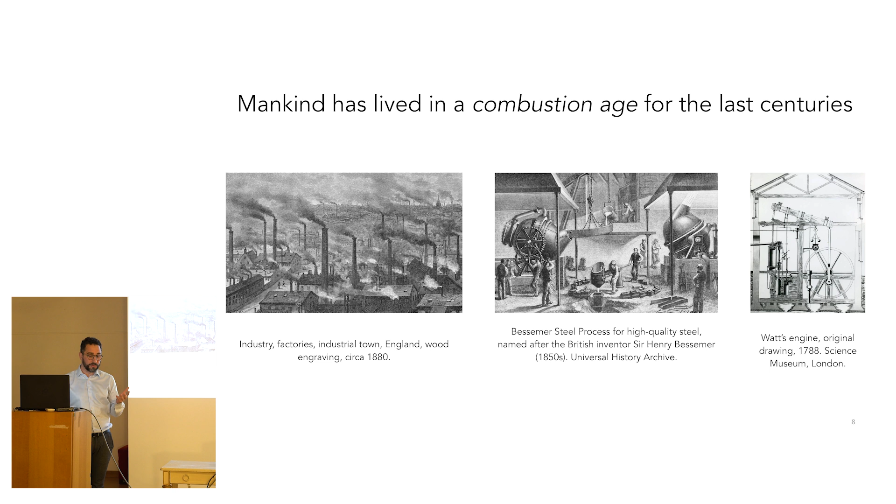And this was the time when combustion was used to produce materials like steel, and it started to be used for transportation. You see here the original drawing of Watt's engine, and you see here the first steelmaking process, which was really delivering high quality steel, the Bessemer process. So I think it's really fair to say that we have lived in a combustion age for the last centuries.

And even Europe, I might add, has its roots in combustion, because you probably know that after the war, it was decided to unite, you see, la mise en commun de production de charbon et d'acier. So these industries of steel and coal were put together in the effort of not only sharing the resources, but also preventing future wars. So we could say that Europe has its roots in these combustion processes.

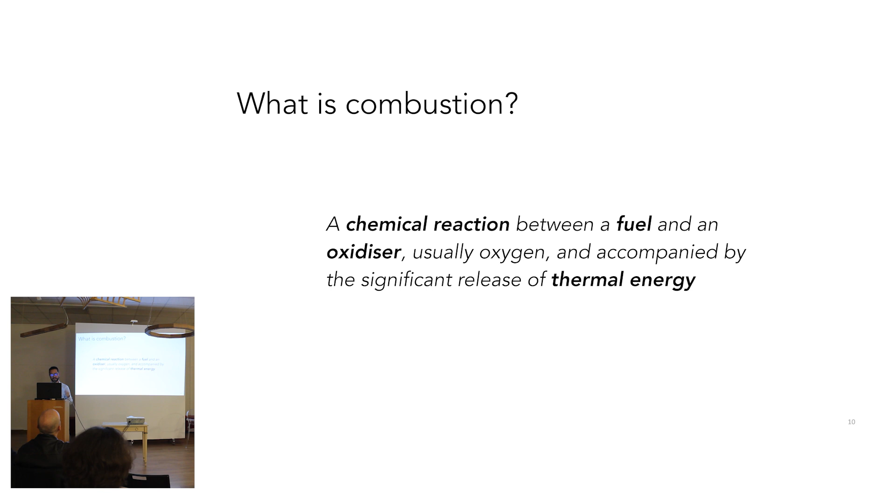But then you might wonder, so let's try to not be the alchemist here and define what combustion is. Combustion is a chemical reaction between a fuel, the substance that contains in itself the energy, and the oxidizer that allows this energy to be released. This oxidizer is usually oxygen, and this is associated with a significant release of energy. This is why it has been used so much and to that extent in the last centuries.

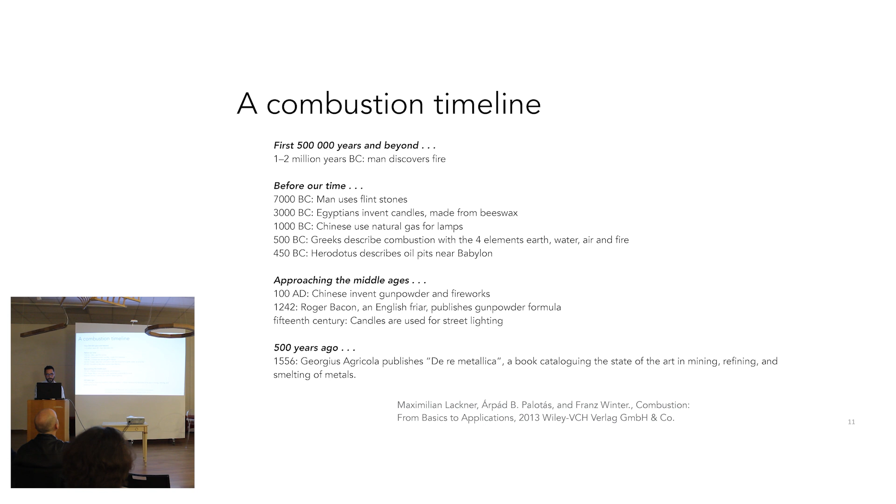So I actually drew a timeline, and these are four slides. Julien told me to remove it, and I didn't. But anyway, I just kept it to show a couple of things. So when you look at this timeline and you look at very long ago, you see that a few things happened, but not many.

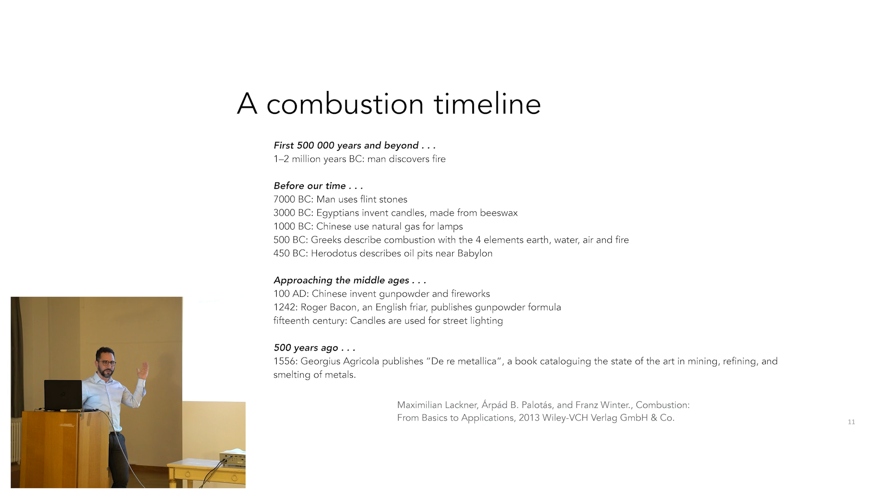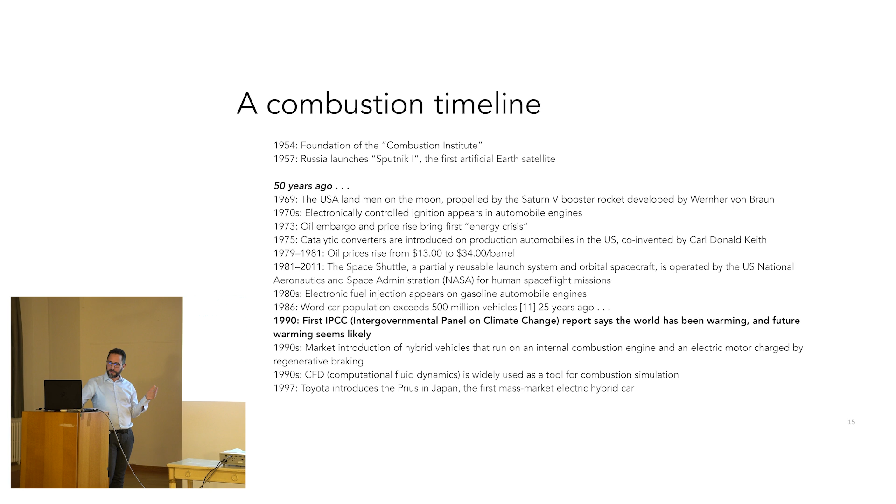And then you see that as we go on and on, you have many, many things that happen. They become denser and denser. I also discovered that there is a Nobel Prize on combustion, and I didn't know this. I admit my ignorance here, so I didn't know. And then you see that it really becomes really dense, all the discoveries and associated effects to combustion.

But you see that when you approach the 2000s, some of the aspects that are associated to combustion are more related to the downsides of combustion, so the negative effects. And this is particularly visible in the last events that I have highlighted here. So they are all events that I have highlighted to point out the negative effects brought by combustion on the climate, but also on air quality.

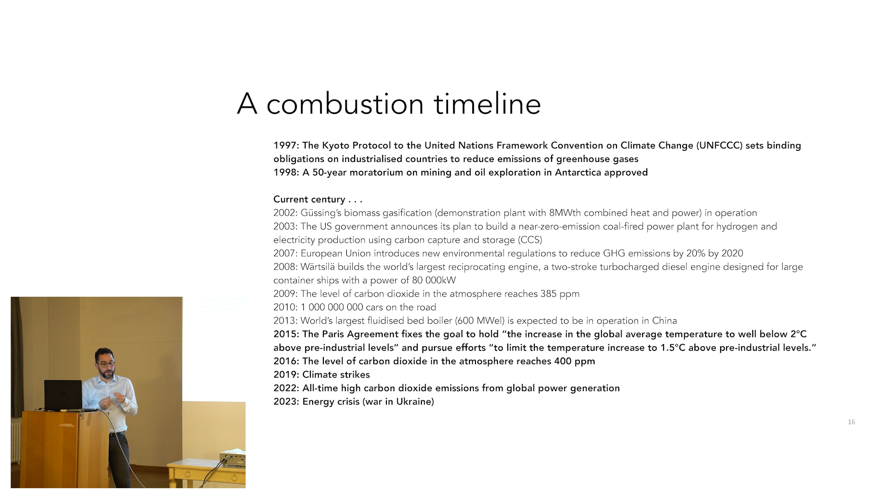Okay, so this brings me to talk about this. What are the problems that are associated to the use of combustion processes? You probably know that in the COP21 it was decided to try and limit the temperature increase to 1.5 degrees. This is associated to a certain amount of CO2 in the atmosphere. However, when you look here at the carbon budget, so the amount of emissions that we can still afford to be able to keep this temperature increase below the 1.5 degrees, we realize that we have almost depleted this budget.

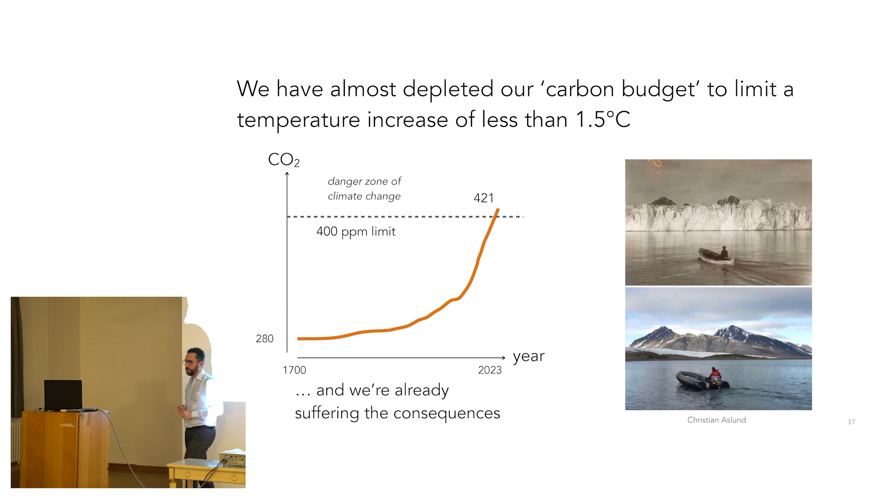And we already know that we're suffering all the consequences, because we have all proofs of the effect of climate change. And here I just wanted to point out this with this beautiful picture of the Swedish photographer Christian Aslund. There is a website, you can go and look it up. What he did was to take pictures after 100 years at the same location, more or less, in the same period of the year, and you see the big impact of climate change, especially in the northern regions.

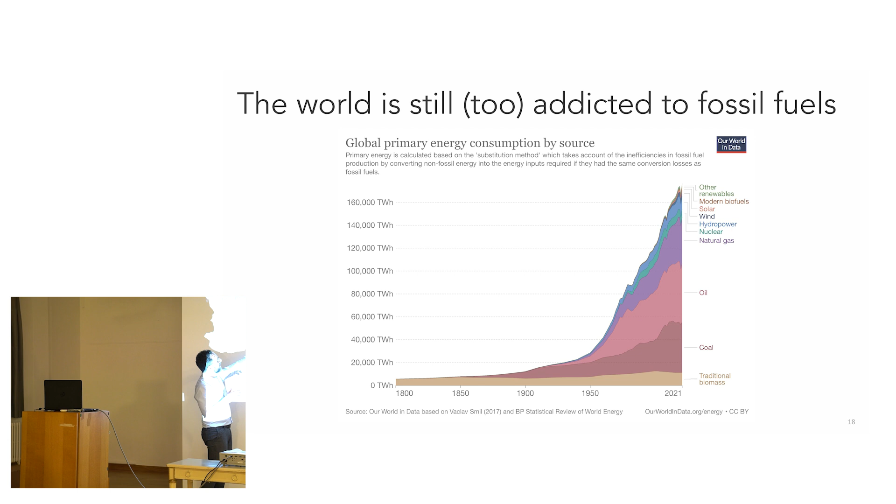When we look at this, we think, okay, where are we with using non-fossil fuel resources? Because, of course, the combustion of fossil fuels is responsible for that. And probably you have used this website, or you're familiar with Our World in Data, because everyone has looked at this website during COVID. But here I want to show you the energy use. So here what you see is the global primary energy. What is primary energy? It is the energy available in nature. So fossil fuels, you see hydropower, and so on and so forth.

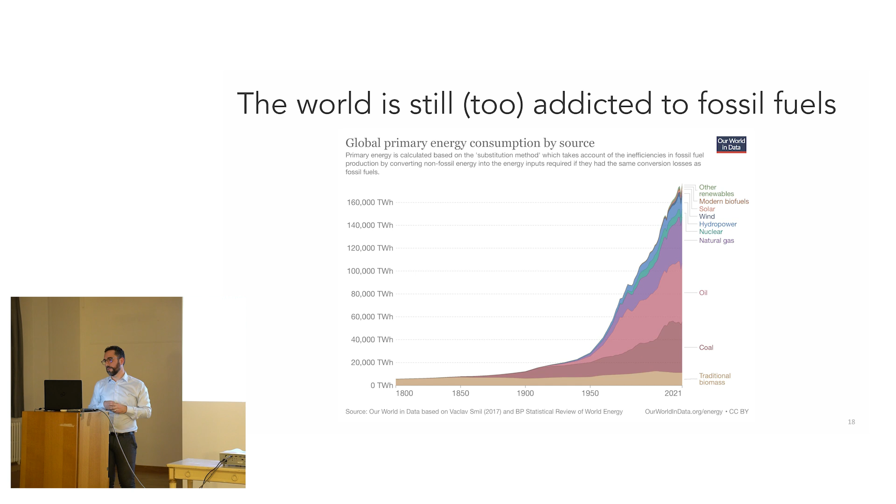I also want to point out something here that if you go home with this message, I would be very happy. There is a great misconception on energy. One of the main ones is energy equals electricity. Electricity is only one of the end uses of energy, and it's not even the largest one. The largest end use of energy is heat. Almost 50% of the energy use is to produce heat. Heat that is needed in several processes, like casting, steel production, glass production, ceramics production.

Everyone here has something on himself, herself, that is associated to a combustion process. And so this is something that we all should keep in mind. Electricity is just the tip of the iceberg. What is below is much more relevant and scary from a certain point of view. So heat is the big elephant in the room, we could say that. And it's a big elephant in the room that poses a lot of issues.

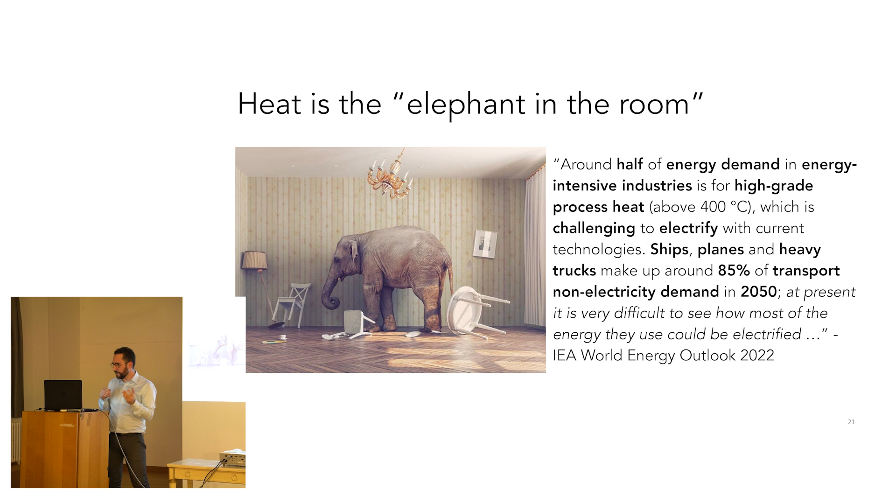Because even if you look at the World Energy Outlook, which is produced every year by the International Energy Agency, there are big issues associated to electrification of processes to produce heat. So while several other processes like heating of this building can be electrified easily, it's not easy to electrify the production of steel, glass, ceramics. Everything that goes under the umbrella of what we define energy-intensive industries, or hard to abate. Have you heard of hard to abate CO2 emissions? Energy-intensive industries.

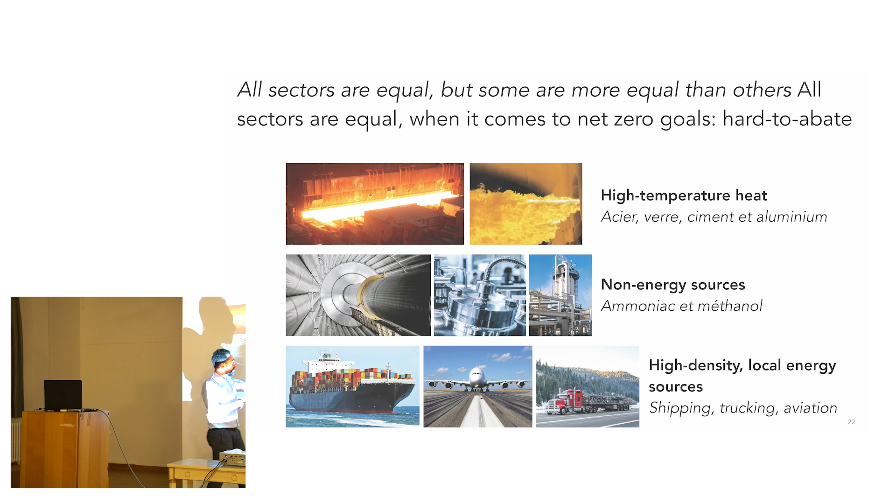These are all these industries that require high temperature heat. So heat at very high temperature that you cannot provide with an electrical equipment, or they need non-energy sources to produce chemicals. Ammonia is the main fertilizer used in agriculture. These require a lot of energy, and this energy cannot be provided otherwise than with fossil fuels today. Same methanol. Sorry, I don't know why this is in French. Methanol and ammonia. The same stands for high density local energy sources, and so everything that concerns shipping, trucking, aviation.

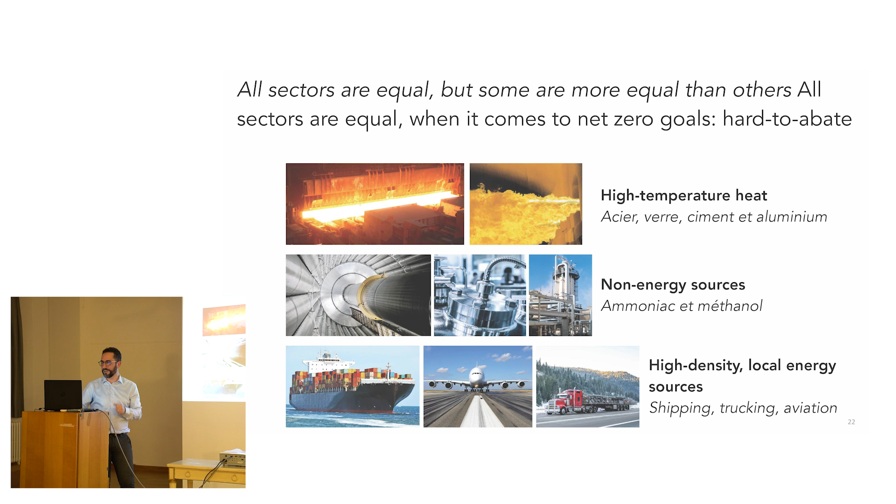So here I was citing George Orwell. All sectors are equal, but some are more equal than others when it comes to these net zero goals. And these hard to abate sectors are really, really hard to abate. It's very challenging. I want to actually show you why this is challenging, and then maybe give you some optimistic view on the future, and not to go home with a dark view on the future.

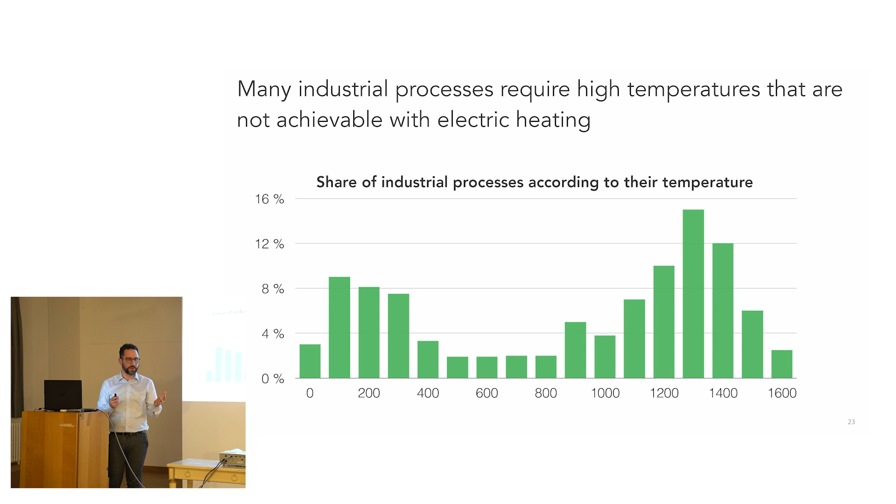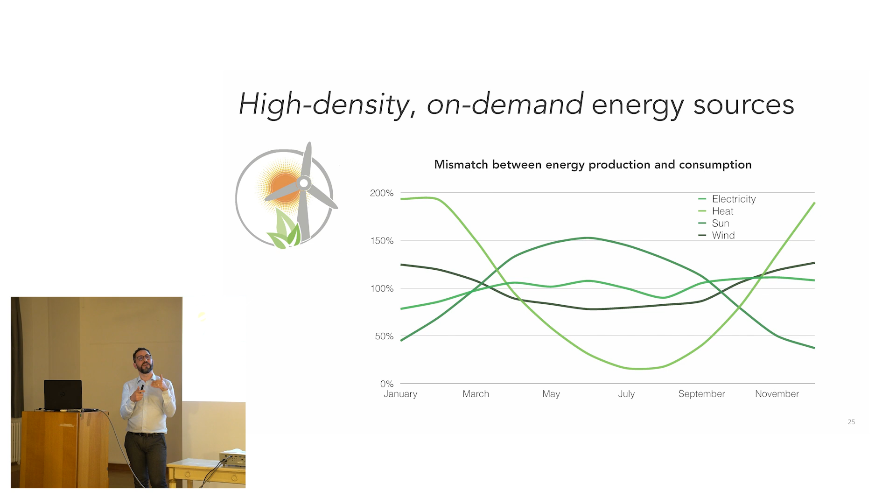Now I want to give you an example, and I think it's a very clear example that shows the challenges here. Have you heard about Solar Impulse? So it's a remarkable technology development by Solar Impulse. It's a company, and it's associated to an industry that is in Brussels, Solvay. So this is an airplane just powered by solar panels. You have solar panels on the entire wingspan and the body of the airplane. However, this is one passenger, 200 square meters of PV cells for a very small weight, 1,600 kilograms. Now you might wonder, let's do the same on a Boeing 747.

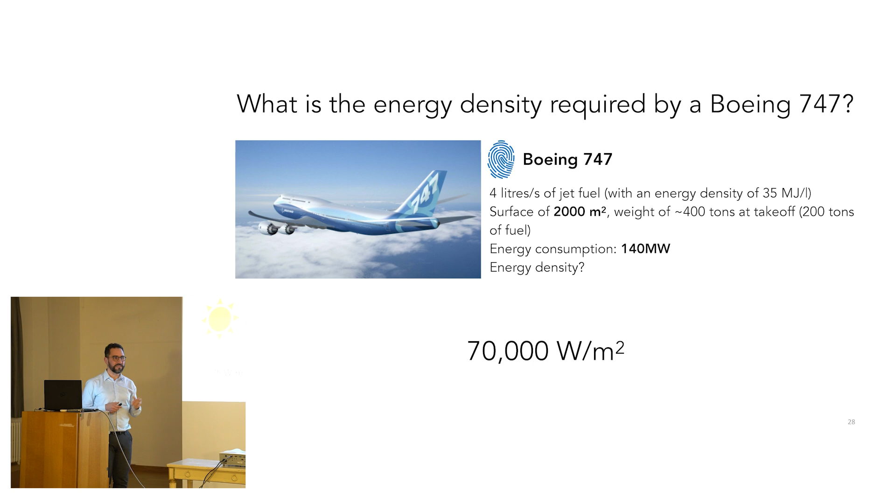What can I get with solar panels? I can get 75 watts per square meter. Okay? So it's 0.1% of what is provided by jet fuel. So you see here the magnitude of the issue. The big elephant in the room is 3 orders of magnitude bigger than us. Okay, and now there is the fun. The people that like Tesla will say, okay, I will put Tesla batteries and I will run my airplane. However, you will realize that the weight of these batteries will be 50 times the weight of your Boeing 747, which will never take off. Okay.

So these are the issues we are with. So what are the issues? The issue is that these industries produce 30% of the global greenhouse gas emissions. They are responsible for 10% of the CO2 emissions from combustion processes, and they are very highly integrated. But the real problem is that we need them. We need steel, we need glass, we need ceramics. And so what do we do?

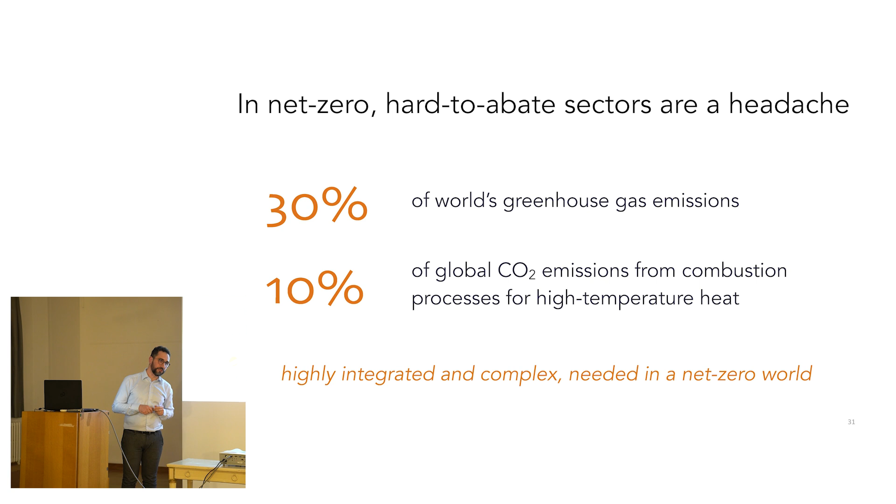So this is why these are really the sectors where we would say this is a headache. There are solutions, and people are working on that. And I think Europe is actually funding a great deal of projects on that. What is a possible scheme to address this?

One scheme: I've talked about the mismatch between the need for energy and the production of energy. This also means that there are periods of time where I have excess production from renewables. What I can do with this excess of production is use it and store it in what we call synthetic fuels.

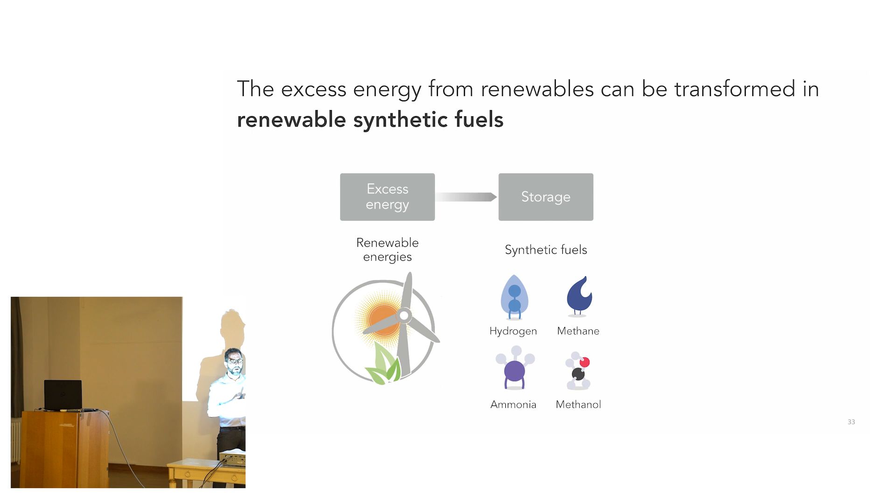Now, these are fuels that are produced by reactions that are controlled in reactors, but now you're no longer using a fossil fuel; you are producing the fuel yourself by doing what? By using this energy to electrolyze water. The electrolysis of water will produce hydrogen. Then if you have nitrogen from the atmosphere, you can produce ammonia. And if you have any source of CO2, carbon dioxide, you can go on and produce your synthetic methane or synthetic methanol. This approach is interesting.

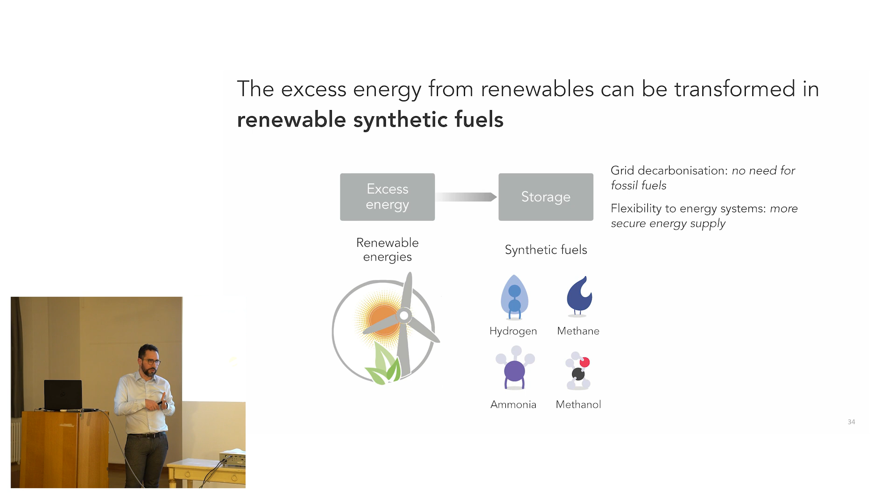Why? Because it provides a solution to the decarbonization goal that we are after. So we can decarbonize the grid because we can now rely on synthetic fuels. We don't need fossil fuels anymore. And it also provides the flexibility of the energy system, because now we could produce, theoretically, the fuels wherever we want. We just need wind and sun and some chemical plant.

So in Belgium, maybe you don't have sun, but you have wind. Just to say that you can produce hydrogen also in Belgium, and there are many projects in Antwerp in that respect. However, and here comes the interesting part, once you have produced this fuel, I would say that the ball is again in the field of combustion, because you might have whatever fuel you want.

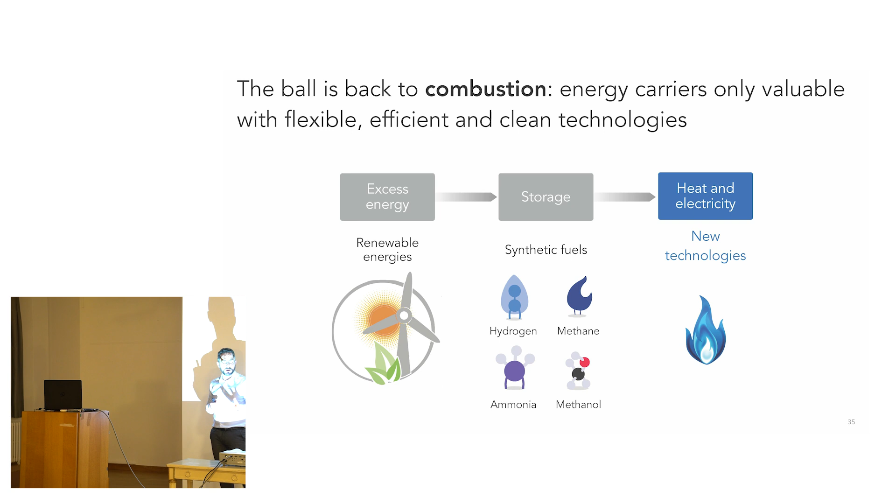Synthetic fuels are actually not new. In the Second World War, you probably know that they were produced, for instance, by the Germans to fly their airplanes, because they didn't have access to fossil fuels. So Fischer-Tropsch synthesis was already known. What I mean here is that to unlock the potential of these molecules, you need combustion technologies that are able to convert these fuels without producing pollutants. Because if you have synthetic fuels but you still produce pollutants, you have an issue.

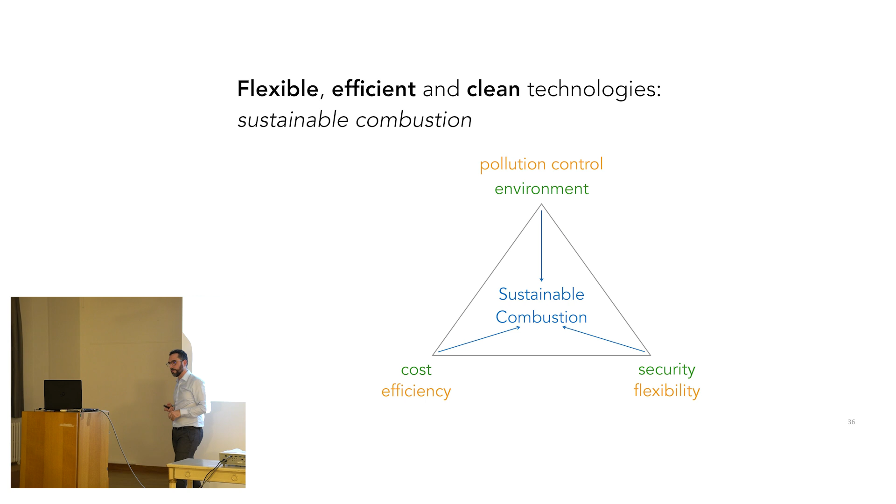Okay, so what we are really after is to deal with what, in energy, is called the energy trilemma. So you need technology that can simultaneously accommodate the efficiency constraint, the flexibility constraint, and pollution control. Basically, technologies that are respectful of the environment, cost-effective, and can assure a certain security of supply. Is this easy? No, it's very complicated and complex, which are two different words, but I will not explain that.

Here, I show why it is complex. It's a bit technical; it's probably the only technical slide I have. Combustion is basically bringing together several phenomena. Two of them are turbulence and chemistry. Now, turbulence: you probably all know Richard Feynman, the Nobel Prize in Physics. He said turbulence is the most important unsolved problem of classical physics. In fact, it's still unsolved. It's one of the millennium problems with a $1 million reward. It is still an open problem.

And on top of turbulence, you now put chemistry, which brings with it small scales and a lot of chemical species. A typical combustion of a fuel can be described by hundreds of chemical species. So the issue here is that you have to take all this into account, put all of it together, and be able to model it. Of course, I don't have time to talk about that, but this is what we do in our everyday life.

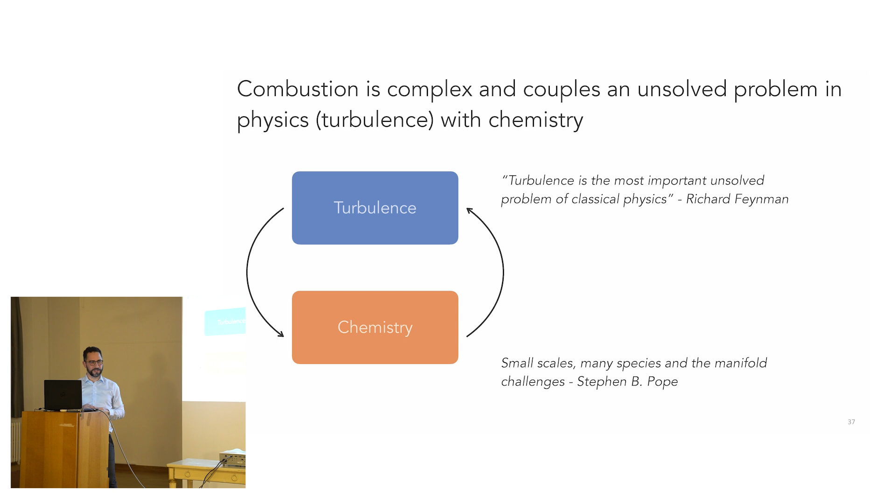Okay, so this brings me to the conclusions. Combustion has shaped our societies, but it's responsible for a large share of carbon dioxide emissions, and it's at the core of what we know today to be the climate challenge we face. Fuels and combustion, however, will continue to play a key role in specific contexts, like the hard-to-abate or energy-intensive industries I've mentioned. And we need new technologies to convert the variety of fuels that we'll produce synthetically with no pollutant emissions and with high efficiency. I hope I have convinced you about that.

If you're not yet convinced, there is another motivation not to give up on combustion if you are a fan of Stranger Things.

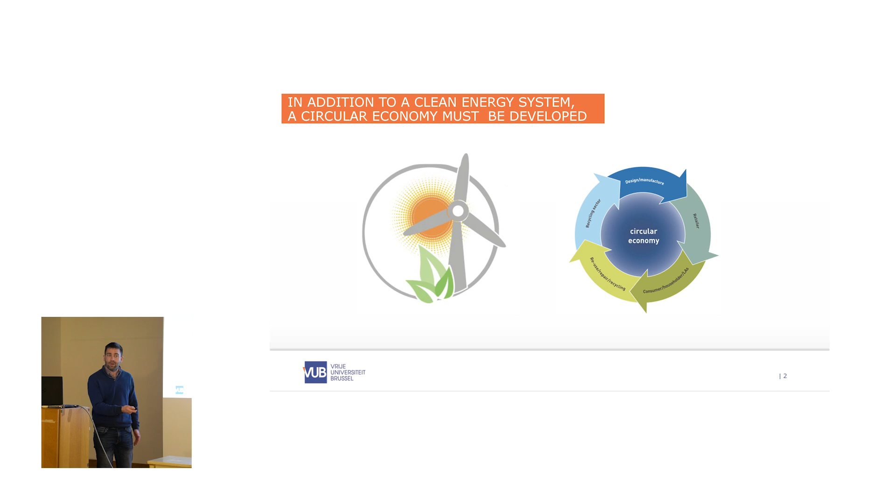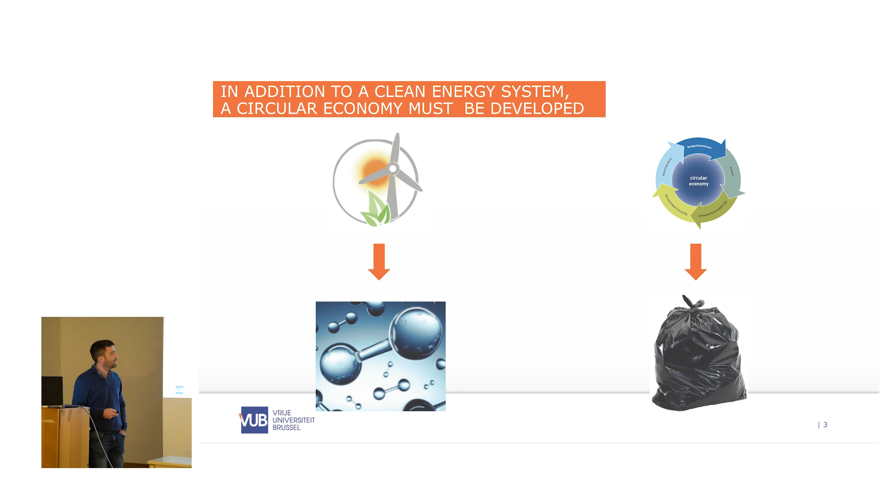So next to the clean energy system, there will be a circular economy. But nothing can be perfectly circular, of course. There will always be waste and residues from that circular economy. So from the excess of renewable energy, and let's hope we will have enough excess to store a bit of renewable energy for the winter in the form of synthetic fuels like hydrogen, we will also have a certain amount of trash. And I say trash, but it's more like waste streams or residues from that circular economy. So it's quite interesting to realize that this can be used as a fuel. After you have recycled as much as you can, there will be residues that you can valorize in the form of energy.

So it's quite funny to realize that you have quite a split between very clean synthetic chemicals that we will make from renewable energy, and on the other side, residues from the circular economy, and in the middle you should put the fossil fuels that we don't want to use anymore. So we will move from a situation where we are completely addicted to fossil fuels, natural gas, oil, and coal, to synthetic fuels on one side and residues on the other. That's a big split, but big splits are something we are used to in Belgium. We're quite good at that.

So, as a joke, this is very easy to burn. It's very clean. It comes out of the factory. No problem. You don't have dirt, you don't have ash, you don't have a lot of pollutants. Burning those residues, this is much more interesting. But I'm joking, because actually I work on both topics and we work in a joint research group where we deal with both, of course. But I wanted to add this.

Now, do we use that kind of trash from the circular economy already? Actually, yes, and in a renewable way. Today, bioenergy is the current way we use some residues to produce renewable energy. Okay.

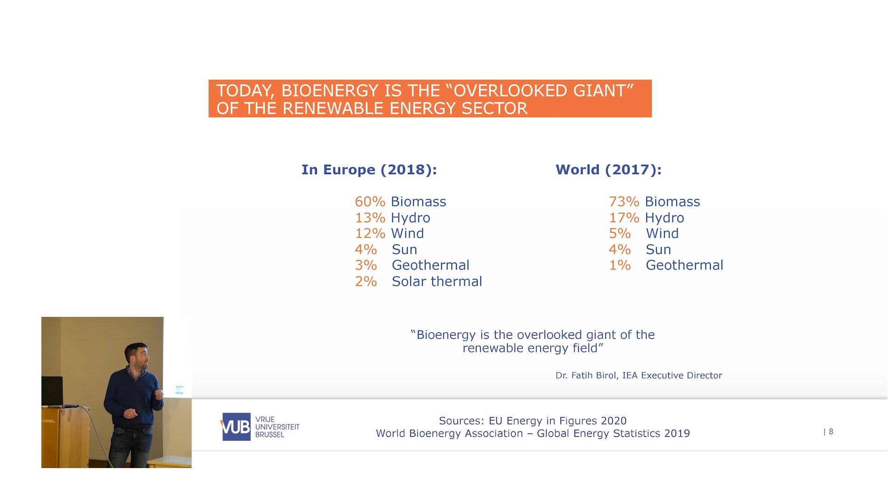So in relative terms, it will go down, and following the IEA, in the end, in 2050, you will have something like 20 to 25% of our needs that would be fulfilled by biomass. So I focus on biomass here for a few slides because it's the main residues that we use today to produce renewable heat and renewable energy. But it's mainly today woody biomass, meaning wood.

And you might say, why do you burn wood? We could do much better with wood than burning it. First of all, we could do cardboard and planks and so on. As I said, of course, it's already taken into account. We're talking here about the residues from that industry. But people are thinking of doing bioplastics in the future. Could you use wood to do bioplastic? Well, maybe there are some processes, but it's not industrial scale yet.

So today, we're talking about residues for which we have no other application. In the future, of course, you should use that resource the best possible way, which means doing bioplastic to replace fossil fuel, for instance. And then we will use the residues from that circular or bio-based economy to produce heat. So for the moment, agricultural biomass is only 20%, but it will probably grow in the future. Use more residues from agriculture and bio-waste, anything biodegradable coming from your waste or from waste from industry and so on.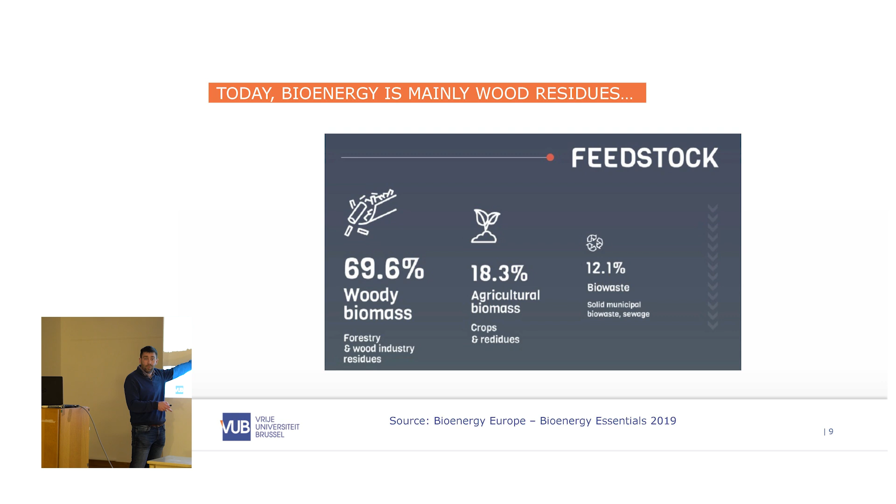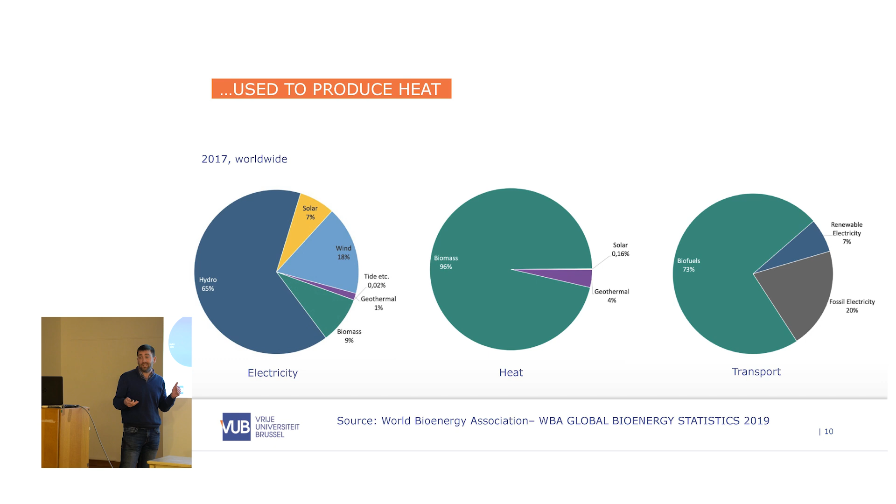And the same goes with mobility, but of course electricity also will ramp up quite fast with the development of electrical vehicles. But for the moment, it's mainly biofuels. So biomass is a giant today because there is no alternative yet for green heat and green transportation, green mobility. That's the reason why. But as I said, it's expected to decrease in the future.

All right. So what are the challenges of the use of all those residues to produce electricity and heat? Hopefully together, but I will come to that. There are two main challenges according to me. Fuel flexibility. Why? Because the material or the fuel that will be available to produce heat and electricity in the future will decrease in quality, exactly as I said. For the moment, we burn nice wood residues to produce heat and electricity. We will do something else with that in the future. So we will end up with the residues from those processes or trash from the bioeconomy and the circular economy.

Because of course, that's the waste hierarchy. You need first to prevent the production of waste. Then if you need to use some materials, you need to reuse them as much as possible. Then you need to recycle them as much as possible. And then in the end, that recovery part is about waste to energy. Recovery means producing energy from it, burning it in the end to produce heat and electricity. And then if you have no choice, disposal, but this should be as limited as possible, of course. So this is the reason why the material that we will get, and that's a very interesting research topic, will decrease in quality, but still we will need a lot of energy.

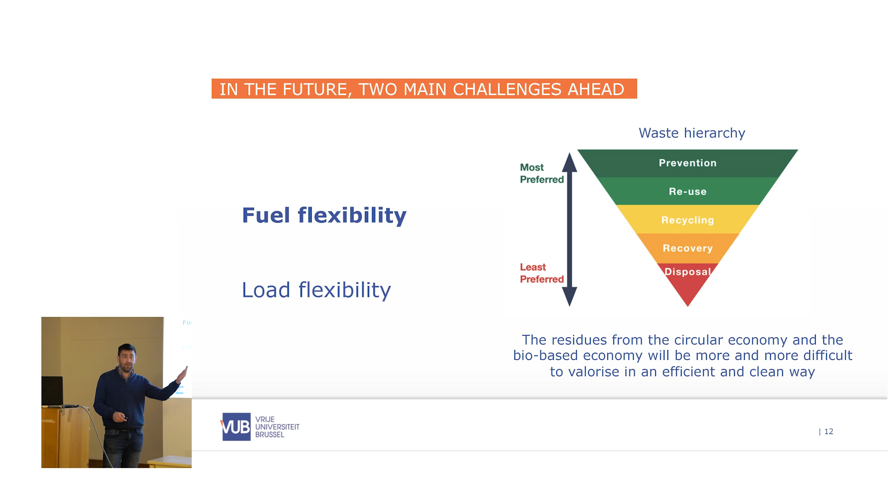Second topic of interest for those units producing energy from waste is load flexibility, because, as Alessandro said as well, with wind and sun, there is not always wind or sun. So the perfect system is when you have energy stored in chemical form, or those synthetic fuels that Alessandro mentioned, or all those residues.

Okay. And generally, they are used in a CHP system or cogeneration system. CHP means combined heat and power. They produce electricity, but they also produce a little bit of heat that they can deliver to a client. Okay? So those are systems today, when we use them, they mainly produce heat, and then they inject electricity on the network while they're running. But they first look at how much heat do you need.

Okay? In the future, we should be able to change that so that those resources also support electricity and wind and sun on the electricity grid. Okay? So the load flexibility, how can you change the load as a function of the demand? How can you produce more or less electricity or heat when you need it? Okay, that's a very big challenge in that sector.

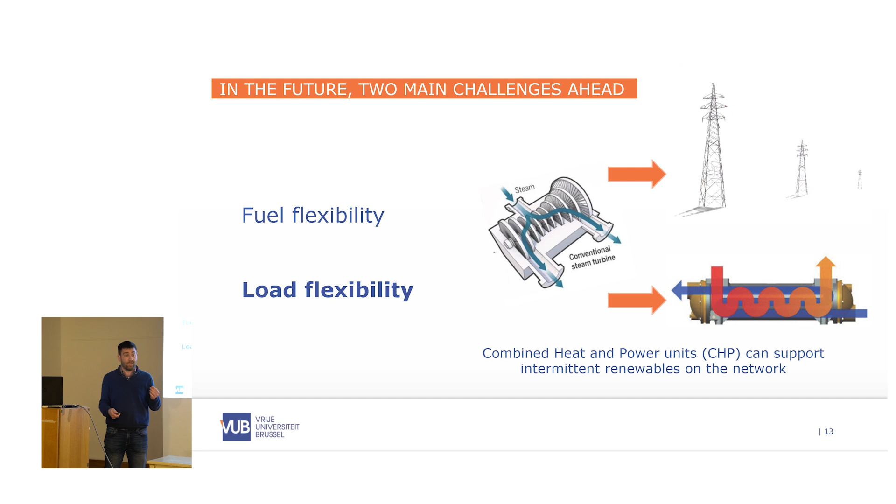Of course, next to those two big challenges, you have additional challenges, technical challenges. The feedstock availability and sustainability, of course. How much will we get of those fuels and those residues? Are they sustainable? Where do they come from? Do you need to certify that?

For the moment, also a lot of discussion in Europe about the origin of biomass. That wood we burn, is it deforestation or not? Where does it come from? Is it a residue from where? There are certification mechanisms in place to make sure that it's sustainable. Of course, a lot of discussion about those mechanisms.

And then, if you want to transport those fuels, okay, you will have to transform them before. If you have a residue from an industry, you need to compact it, to dry it probably, because you don't want to transport water. So you need to dry it, to compact it, and so on. So these are actually ways of producing energy vectors. They might be solid, they might be liquid, they might be gaseous, but you have a waste, a residue, you need to transport it to another country, you need to find a way to make it clean and to be able to transport it at a low cost.

And regulatory barriers, of course, are there because sometimes you just cannot transport some types of residues from one country to another. So we need to be ready to allow the industry to use those fuels. And of course, air pollution, Alessandro mentioned it, that's one problem even with synthetic fuels, that you still produce some pollutants. When you burn pure hydrogen, you can still have nitrogen oxides, for instance, which is a pollutant.

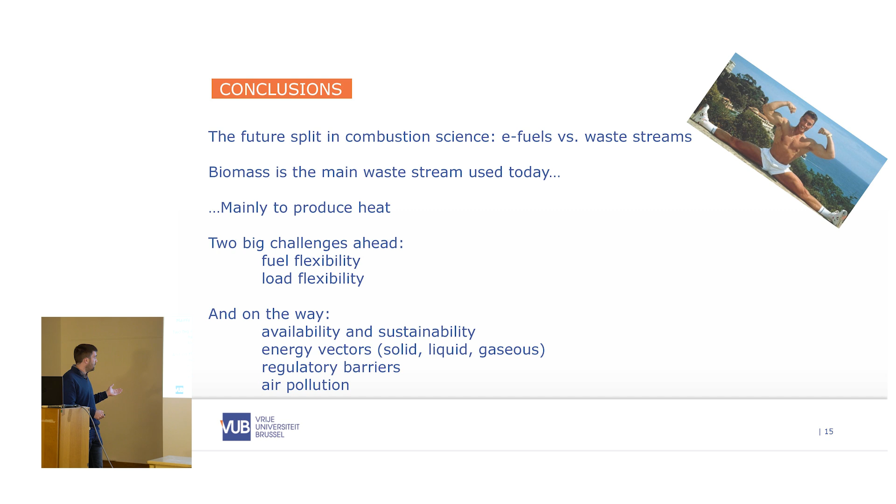And then the two big challenges are the fuel flexibility, we are going to get a lot of different stuff to burn, and load flexibility, because they will need to be able to support wind and sun on the network. And on the way, again, the availability, the sustainability, how do you produce efficient energy vectors, the regulatory barriers, and always the impact on the air quality, of course. That was it.